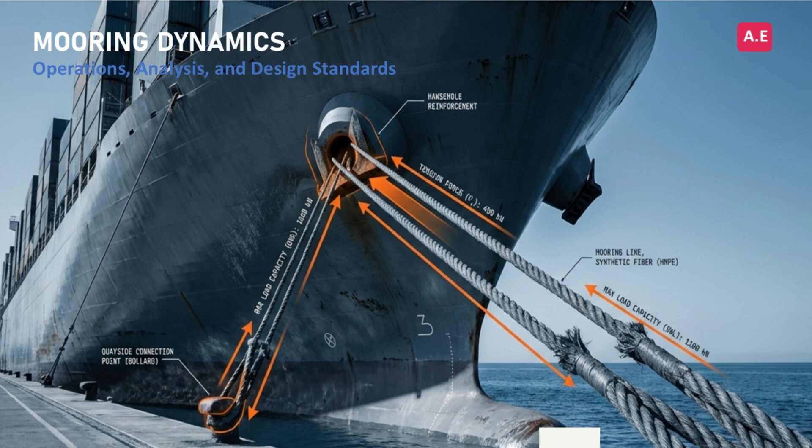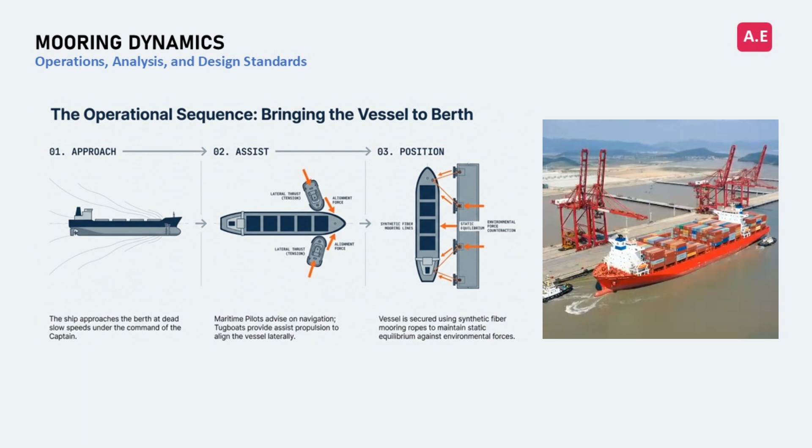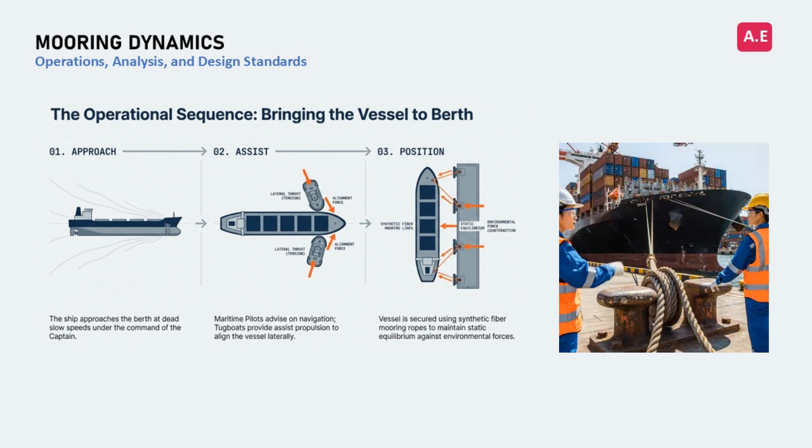You ever see one of those massive container ships or a cruise liner just sitting at the dock? It looks pretty simple, right? Just a few really thick ropes holding it in place. But what you're actually looking at is an amazing feat of engineering, designed to fight a constant, invisible battle. This is like docking a skyscraper that floats, and then trying to keep it perfectly still while the planet is doing everything it can to move it. The answer isn't just get some strong ropes. Oh no, it is way more clever than that.

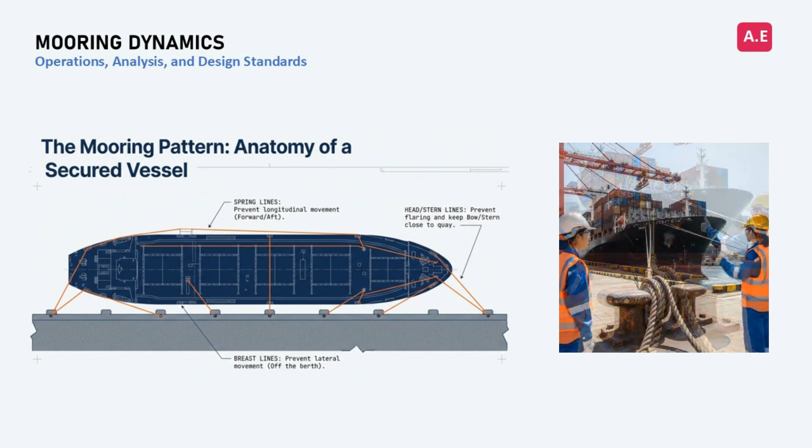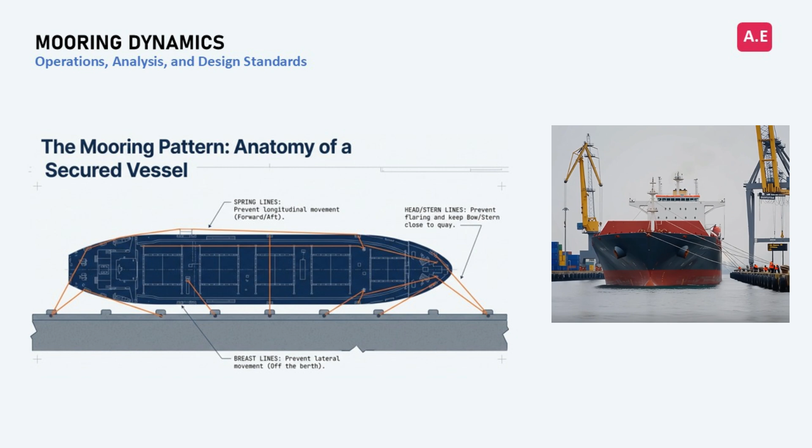So what we see from the shore looks like this carefully choreographed dance. You've got the tugboats nudging the giant ship into place, then the lines start getting passed over to the dock. First up are the spring lines, which run diagonally to stop the ship from surging forward or backward. Then come the breast lines, which run straight across to keep it from drifting sideways. And finally, the head and stern lines lock the front and back in place. Looks pretty straightforward. But that whole physical process is just the tip of the iceberg.

Because the second those lines are tied, the real work begins. That ship is now locked in a constant tug of war with some of the most powerful forces in nature. This is where we get into the real battle. You have to understand that word parked is totally misleading. A moored ship is anything but still. It's under a constant, relentless assault from the environment around it.

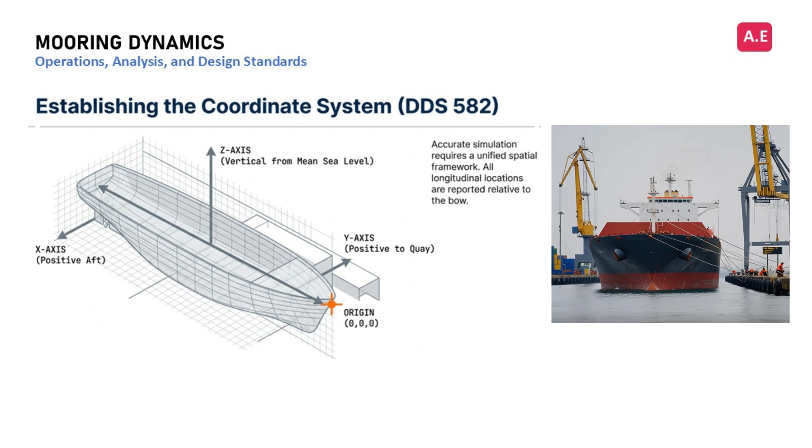So what are we talking about? Well, first, there's the wind. A massive ship has the surface area of a building, and the wind is just slamming against it with incredible force. At the exact same time, under the water, the current is pushing and pulling on the hull. Together, these two forces create enormous pressures, trying to rip the ship right off the dock, both sideways and lengthwise.

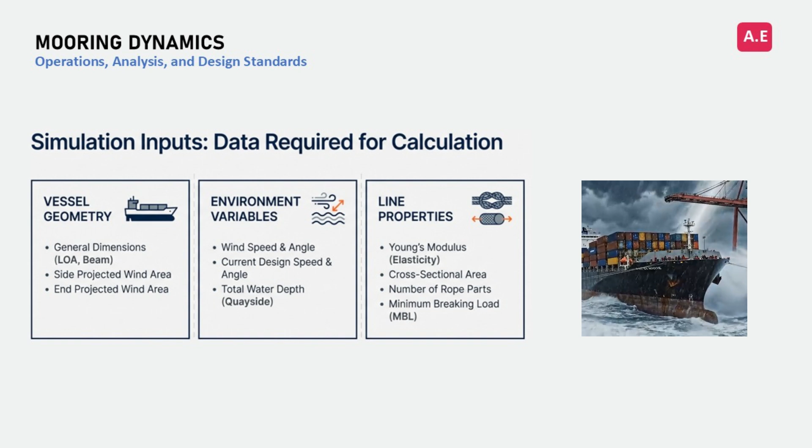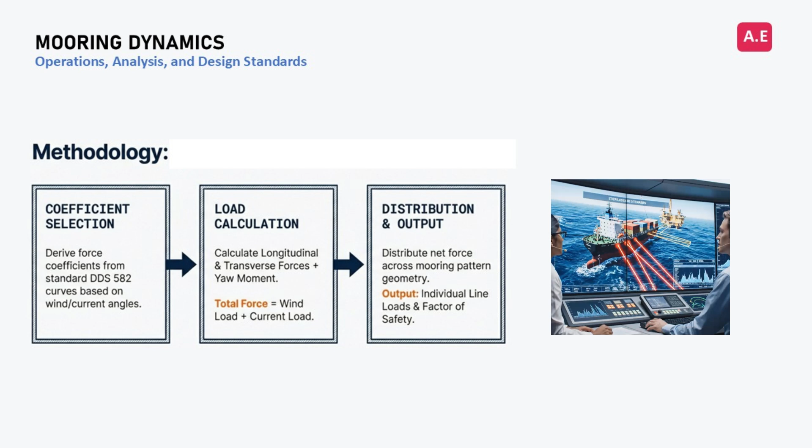So you can see why you can't just guess how many ropes you're going to need. Naval architects use sophisticated software to calculate all these forces with pinpoint precision. They design a very specific mooring pattern for that ship in that port for those exact conditions. They need the ship's exact size, its shape, how much of it is exposed to the wind, the projected wind speed, the speed of the current, the depth of the water, and even the precise angle and material strength of every single rope being used. It's an unbelievably complex equation.

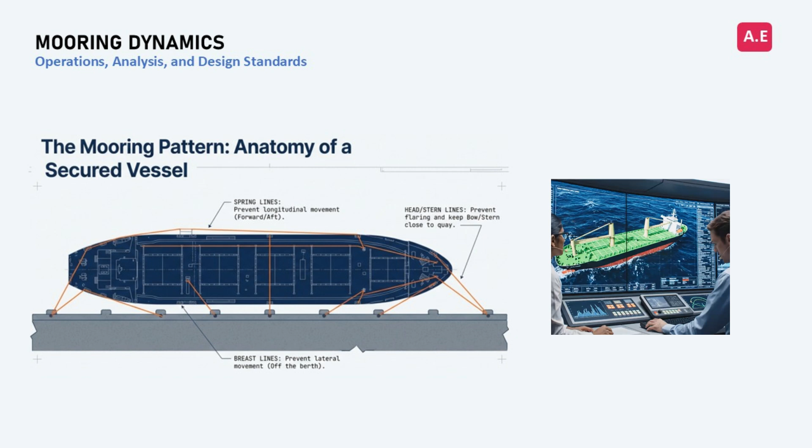And the whole point of all this complicated math is to figure out the exact tension on each individual line. Why? To make sure the whole system can handle forces way bigger than what it's ever expected to face. It's all about building in this huge factor of safety.

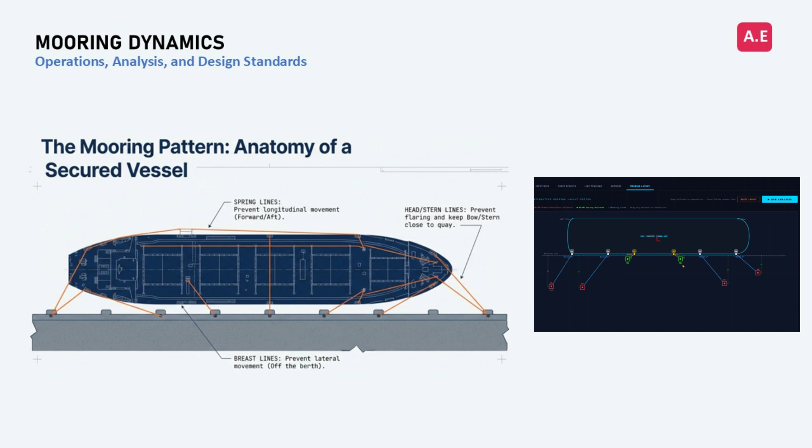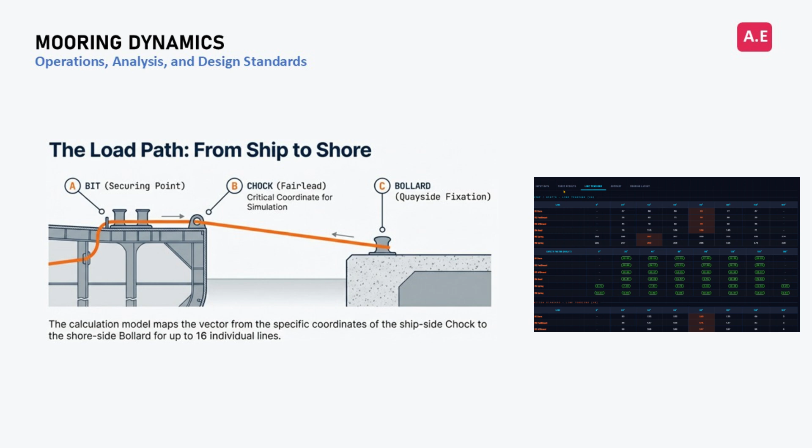But that idea leads to something even bigger. All those calculations lead to a really important shift in thinking. This isn't just about having a bunch of individual super strong ropes and winches. It's about designing one single cohesive system where every single part is sized in relation to one core number. And that core number has a name. It's called the Ship Design Minimum Breaking Load, or SDMBL for short.

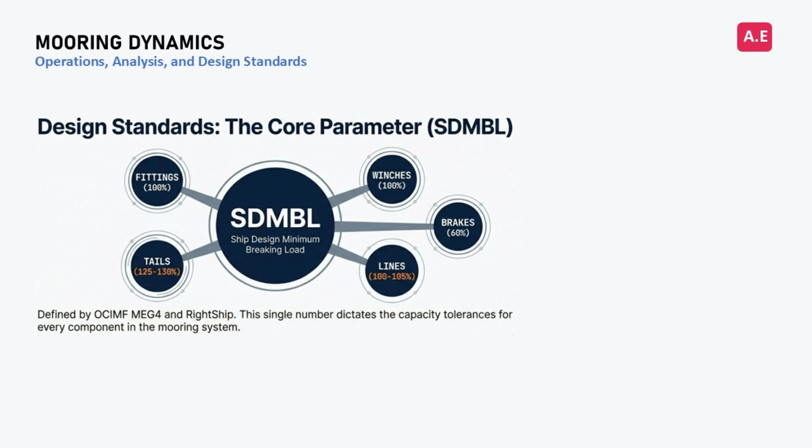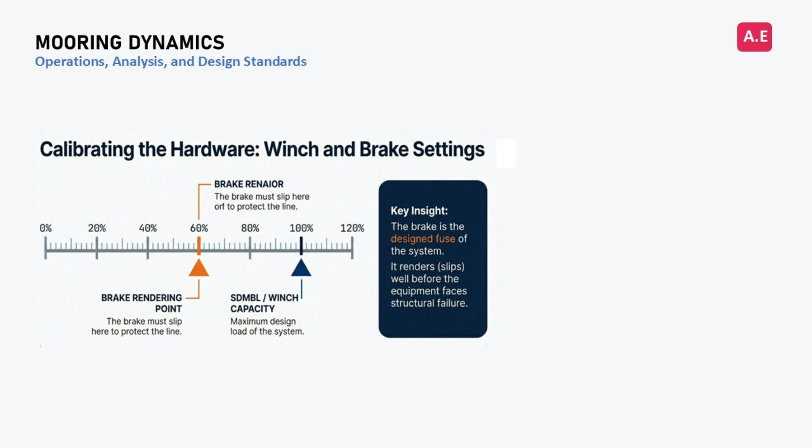You can think of it as the ultimate strength value for the entire mooring system. Everything else, every winch, every rope, every piece of hardware, is designed and chosen based on this one absolutely critical number. And this table lays it out perfectly. It really shows you that system's approach. The winch's safe working load is set to exactly 100% of that SDMBL. The main mooring line itself is designed to break at just a little over that, 100 to 105%. And then check this out: the mooring tail, which is a shorter, more elastic piece that absorbs shock, is even stronger at 125 to 130%. Every single piece is calibrated. It's like a symphony of strength.

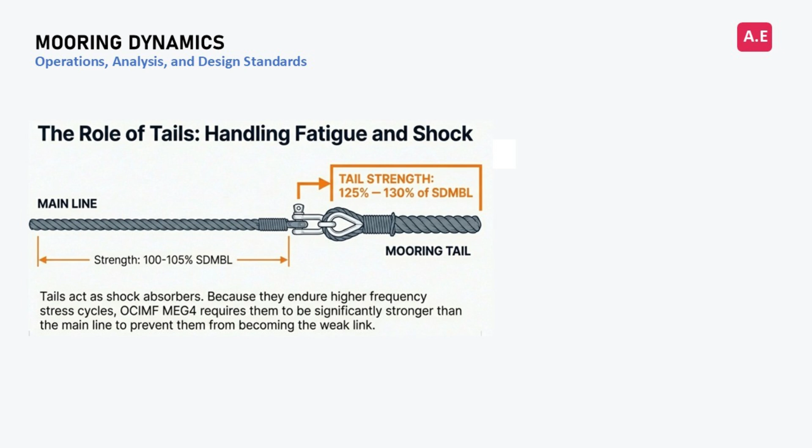So what we have here is this perfectly balanced system engineered for immense strength. But hidden inside this design is a secret. It's a really beautiful, totally counterintuitive piece of engineering that is the absolute key to keeping everyone safe. This is where the real genius comes in. Because to make a system this powerful truly safe, you have to intentionally design a weak point. I know it sounds completely crazy, but it is absolutely brilliant engineering.

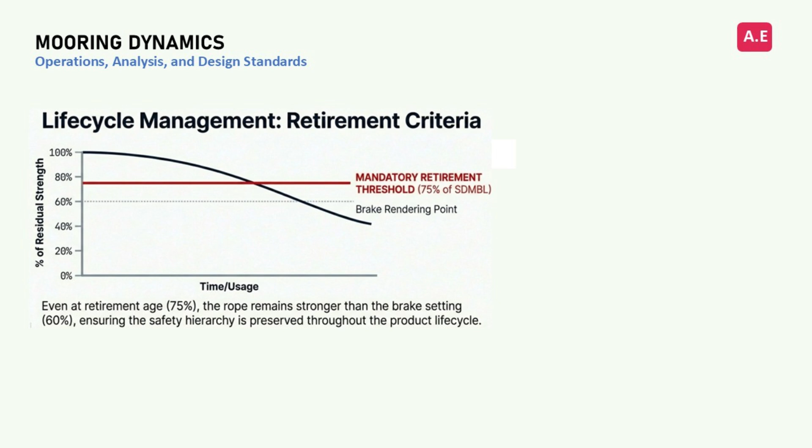So let me ask you, in a system where every rope can hold hundreds of tons of force, where every piece of steel is massively over-engineered, what do you think is deliberately designed to be the weakest link? The answer? It's the brake on the winch that holds the mooring line. It is the single weakest point in the entire system. And yes, it is that way completely on purpose. This is not an oversight. This is the most critical safety feature of the whole setup.

And here is the magic number that makes it all work. That winch brake is specifically set to slip, the technical term is render, when the tension on the line hits just 60% of the system's total design strength. Not 100, not 90, just 60.

So let's play this out. Imagine a sudden, monster gust of wind slams into the ship. The tension on one of those lines skyrockets, and it goes past that 60% threshold. Instead of that rope straining and getting closer to its breaking point, the winch brake automatically slips, paying out just enough line to release that sudden, dangerous spike in pressure. It's the system's emergency safety valve.

Because when you really think about it, the alternative is absolutely terrifying. The last thing you ever want is a multi-ton rope under that much tension to snap. The energy that gets released is equivalent to an explosion. It is far safer to have a brake that is designed to give way in a controlled manner long before anything gets close to its breaking point.

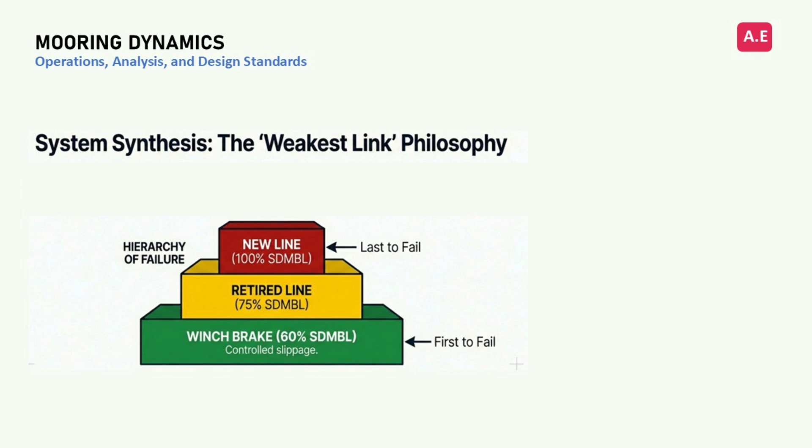So the next time you're near a port and you see one of these floating giants tied to the dock, I really hope you see it differently. You're not just looking at some ropes. You are looking at a complex, dynamic system of balanced forces, a system that was designed with an intentional weak point that makes it brilliantly and so counterintuitively safe.